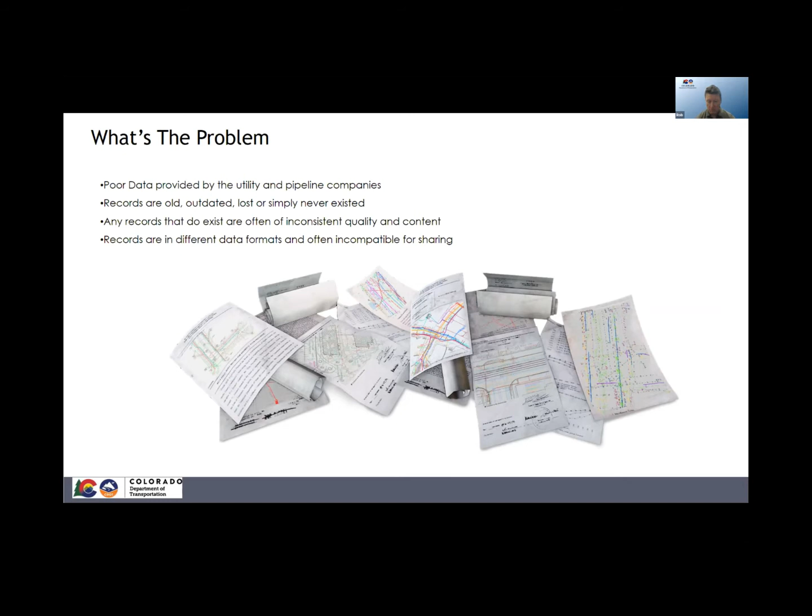So what has historically been the problem with our agency in dealing with utility companies and records? This is not new to anybody on this forum, but poor data provided by utility and pipeline companies, as-built data or records that are old, outdated, lost, or simply never existed to begin with. Any records that do exist are often inconsistent. The quality is unknown, and the content is sometimes unknown as well. Records come in different formats, CAD files, GIS files, paper copies, PDFs, and trying to merge all that together to figure out what is actually in our right of way or project limits is a challenge.

So CDOT as a whole looked at the advantages to moving quicker into a subsurface utility mapping environment. Why are we interested? Having more attribute data about each utility enables more efficient, productive coordination with utility owners. The size of their pipes, the material, the age, that attribute information tells us more about what is in our right-of-way and project limits, and helps us convey it. Some of the utility owners may not even know what they have in our system. So it helps us when we spend the money to capture that level of information.

Knowing the location and depth is extremely important. We've been talking about 3D a lot this morning, and it is very much an important part of utilities. It's subsurface, and a lot of times we survey two-dimensional paint marks on the ground, and that is what is used all the way through engineering design and into construction, and that obviously leads to costly delays and costly relocations that may not even need to happen.

So another big thing for us is during construction, leveraging this data with our contractors and inspectors, the boots on the ground, to use mapping systems that accurately display the location and depth of those utilities, both existing and proposed. I'll show you examples of that in a little bit.

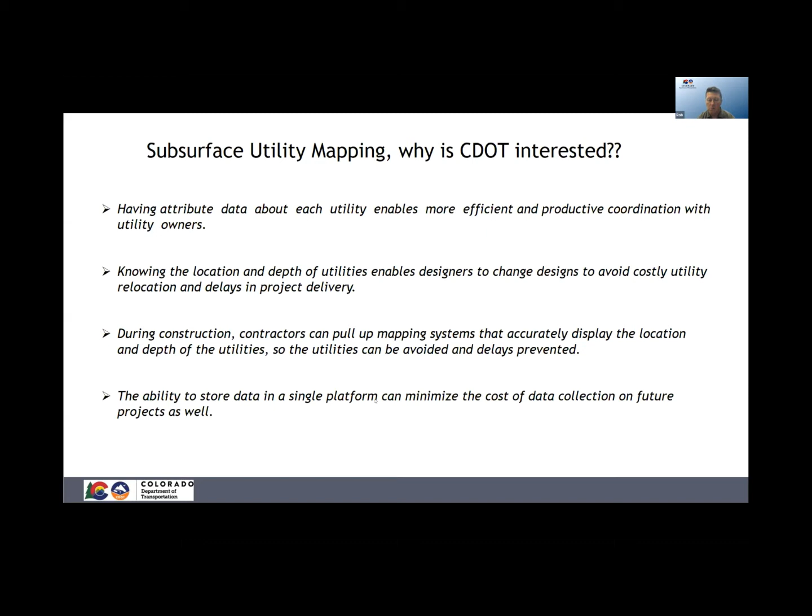But for us, it was really finding a single source or a single platform where we can have all of our data in one place, so that we can leverage that again for all these future projects, or for the existing end users that are working simultaneously around our state on many projects. They can be using the same platform.

So let me jump into a little bit of the legislative changes that pushed us into this subsurface mapping world to really gather data more efficiently. Back in 2015, the Pipeline and Hazardous Materials Safety Administration, or PHMSA, issued rules with new criteria and procedures for determining the adequacy of state damage prevention enforcement programs.

One criterion is the inclusion of an enforcement mechanism in each state's one-call law, which Colorado did not have. We did not have an enforcement mechanism built into our one-call law, which was problematic and could affect federal funding in the future. So that was 2015. We recognized we had this issue, and it was on the radar to address, but as you'll see, it took several years to get there.

In the meantime, we had more damages, and we had an explosion in April 2017 in Firestone, Colorado, that was showcased on many levels as something that could have been prevented. Poor records and lack of locating led to this, so there was all kinds of push from stakeholders, including our Colorado Contractors Association, the American Council of Engineering Companies, ACEC, and CDOT.

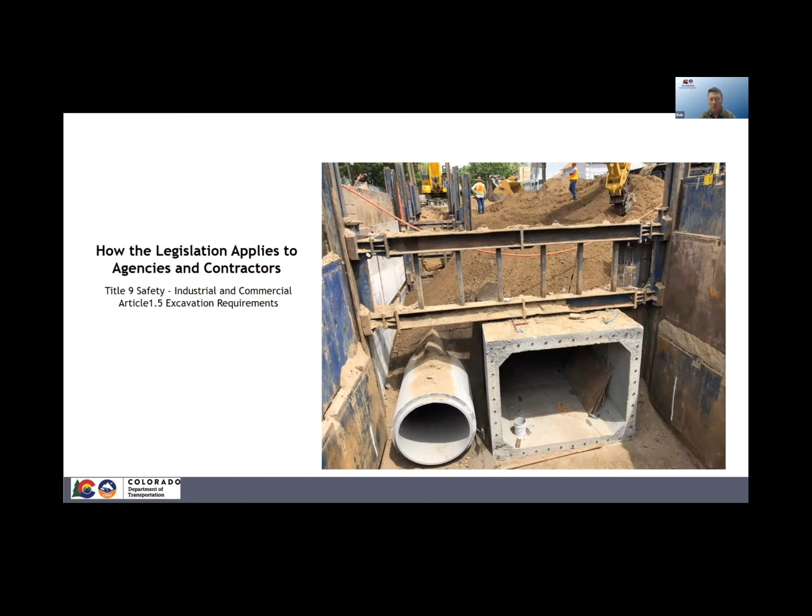There were a lot of stakeholders, but it was really pushed by two bipartisan representatives. Senator Ray Scott, a Republican, and Senator Kerry Donovan, a Democrat, co-sponsored this bill in 2018 to revise our one-call statute, which was signed by our governor on May 25th, 2018. What I'll explain here is how this legislation applies to the agency and to contractors, but it was more impactful to the agency.

From the agency side, the one-call law revision had the new requirement for subsurface utility engineering. It requires CDOT, or the agency, to notify the one-call center if we have a SUE-required project. I'll talk about the criteria we evaluate shortly. But assuming we have met those criteria, the agency must engage the one-call center with a SUE notification.

That subsurface utility engineering notification requires the utility owners to provide their best available records. That could be marking in the field, paper copies, or other information. Best available records can mean a lot, but the law requires a 10 business day return on that information, which is important for accountability by utility owners. And then the project owner, the agency in this case, must provide a stamped plan depicting the utilities at their achieved quality level.

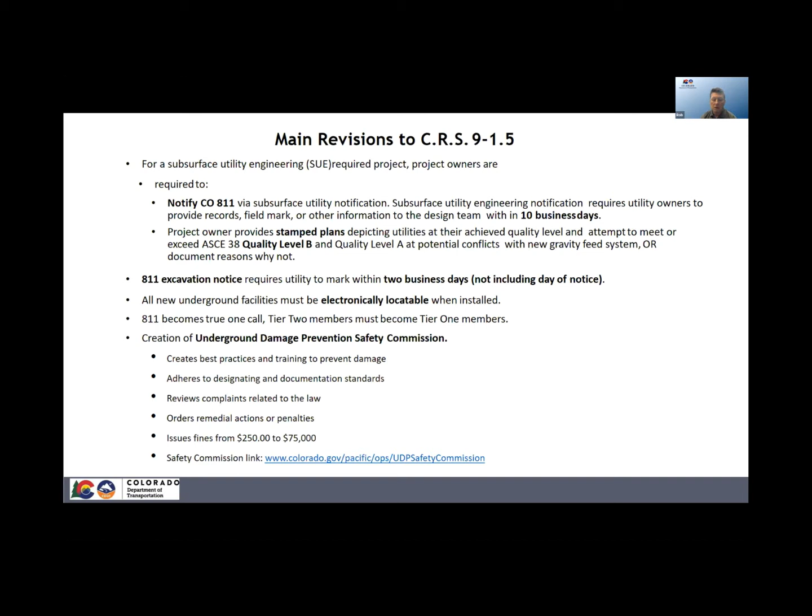and how many complaints are being levied against the company and how many times fines are being issued. So that could start to really multiply as things go forward. So the Safety Commission link is shown here if anybody's interested in seeing what we're up to from the Safety Commission side of it.

So with those changes in the one-call legislation requiring SUE in the pre-construction side, Colorado became an ASCE 38 state. Right now we're at 38-02, but our law is tied to ASCE 38. And so whatever the current version is, when 38-21 comes out, will be applicable to our law. And so CDOT moved into a SUE implementation period after August of 2018.

Sorry, I'm next to a railroad track, if you can't tell. Apologize.

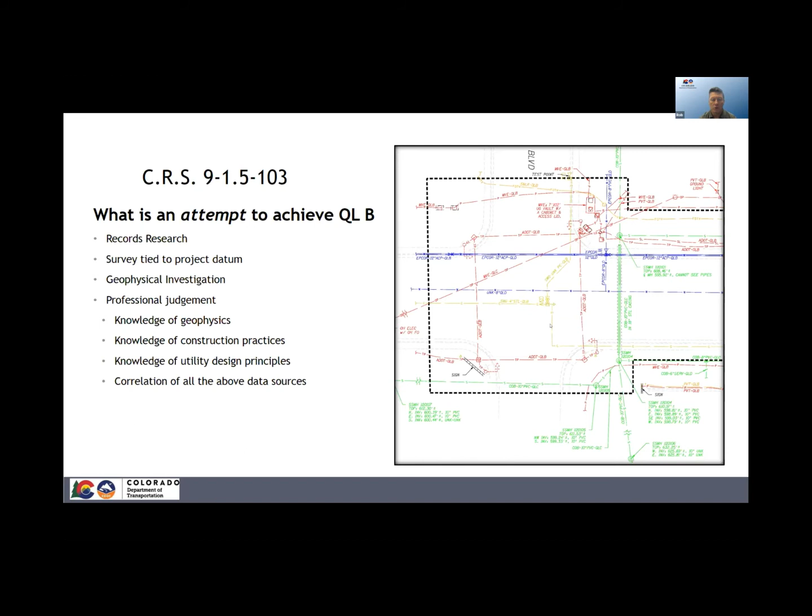And so that's what you're seeing on the right. This is an example of some of our SUE plans that have been delivered by our SUE consultants. Some of the subsurface utility engineering plans, again, SUE required project, SUE notification, the depiction of the utilities stamped ASCE 38 standards, any reasoning why they're not at quality level B is applied, and then any reasonable rationale, again, by the PE in charge of the quality levels is required.

And then, again, quality level A for underground facilities at the point of a potential conflict with a gravity-fed system is a requirement. And so, again, this is what's built into our SUE plans. CDOT had moved into a new process of capturing the SUE data during our workflows. What it entailed was capturing the data, high accuracy GIS data first, by our SUE investigations.

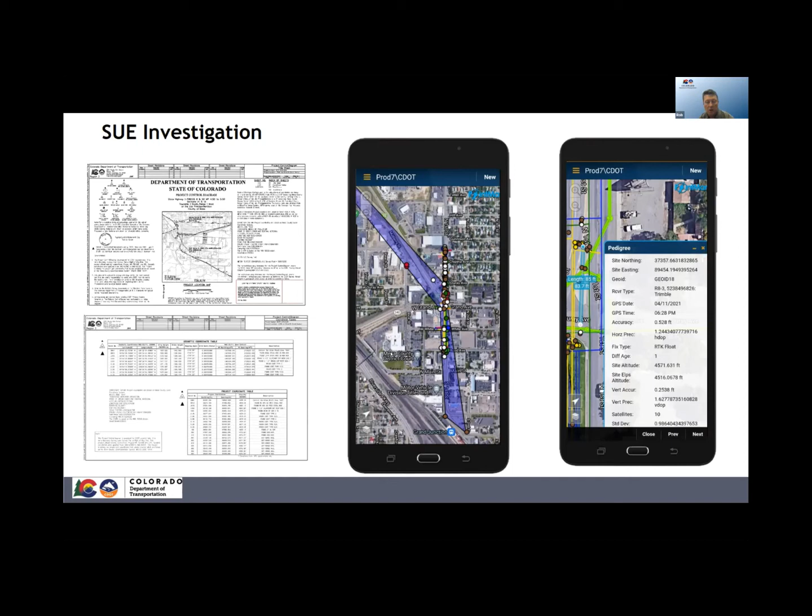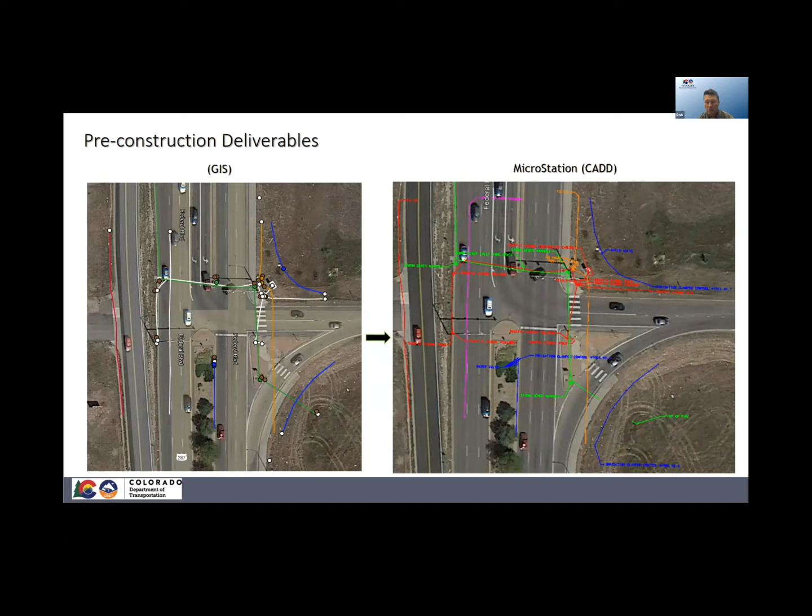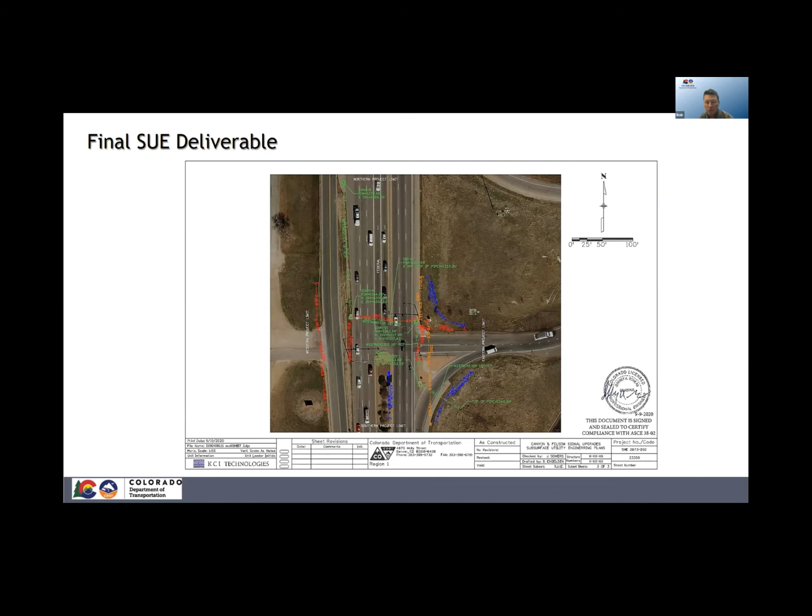And so we have a process that we've developed where we site calibrate our GIS mobile app. The data is collected by the SUE vendors in this app, so we're able to capture this GIS data into our GIS database for utilities, and then move it through a process where we take it all the way through engineering level deliverables. And so this example is GIS data capture first on existing utilities, delivered to our MicroStation environment, and then ultimately delivered with quality levels and a stamped certification by the SUE vendor that this meets the ASCE 38-02 standards at this point.

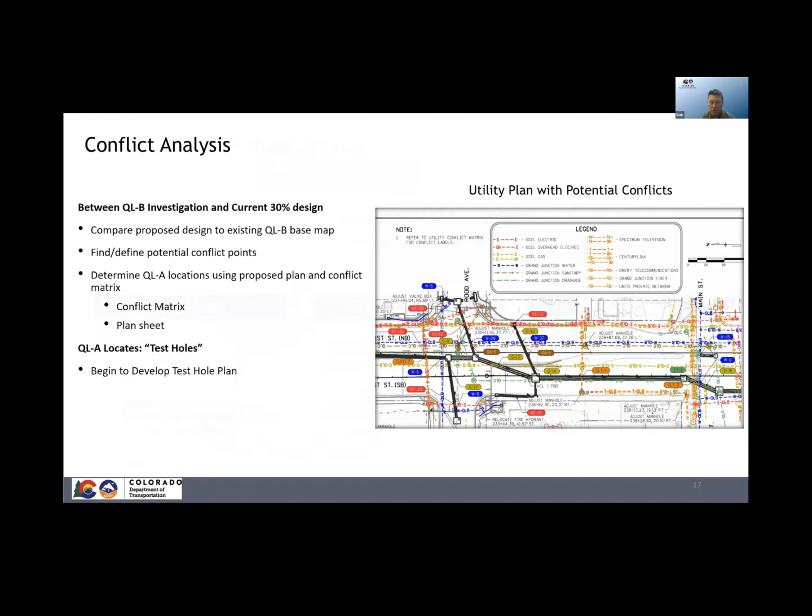But we take this SUE data that's been required by our legislation now, and we leverage it through our design principles. Like I said, from 10 to 30% design, we're using it to find potential conflicts with new improvements. Like this example on the screen is a new storm drain line, and you can see all the flags of potential conflicts. We have quality level B, quality level C, we have quality level B gas lines in here. So we have a good understanding of the certainty of that data horizontally, and then we can move to test holes and hopefully find those much quicker than if we didn't have quality levels assigned to it.

So we leverage, again, this data for a three-part process with our designers: avoidance, accommodation, and relocation. So using good existing utility data, we can either redesign to avoid something that may be a costly or time-consuming relocation on the utility side. We might be able to accommodate the utility and just adjust in place or notch out a wall or foundation, whatever it might be, or we have to go into a full-fledged relocation of the utility, but it then helps us leverage that with the utility companies that we have vetted every possible design criteria, and we've spent the money to investigate their utilities as a whole.

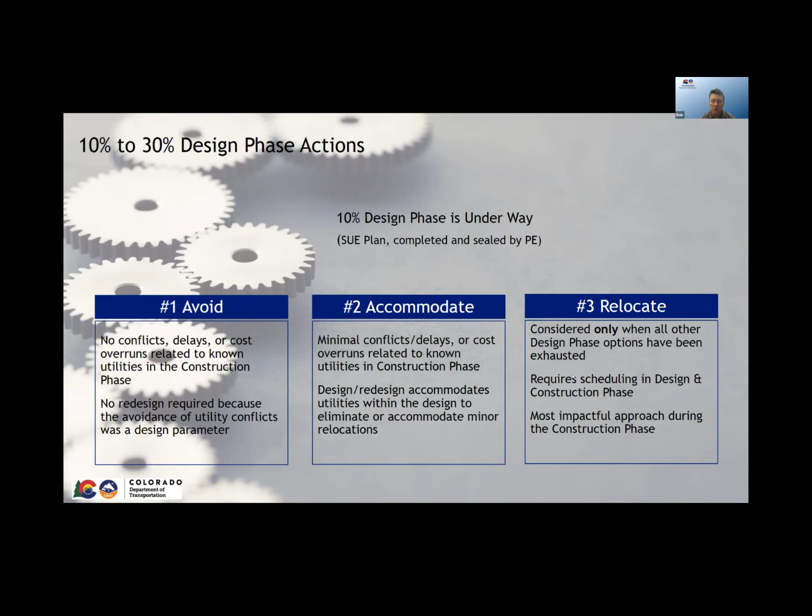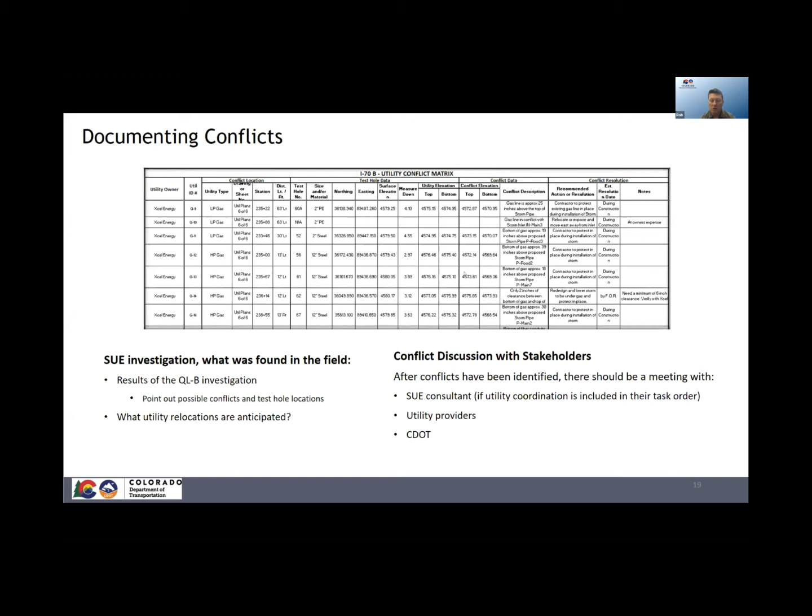So we define this further into a conflict matrix. We take this quality level B information and push it further into identifying the true conflicts. But more importantly, as we get to construction, we then push this data back from CAD.

So we spent the time designing with this information. In this example in CAD, we designed new storm drain based on the SUE deliverable. We've then pushed it back to our mobile app for our contractors to use. And you can see their contractors will then have the ability to see the existing utility information and proposed. So you can see the storm drain lines that are in there as proposed.

And so as they're getting ready to initiate excavation or excavation locates, they have this at their disposal so that they can identify any conflicts with the locating that's happening for excavation versus what we had during the SUE investigation, so it can be resolved rather quickly. But they can also document any new potholing or test holing that they're doing for excavation, and they can also document with photo sketches and forms on the actual construction as well.

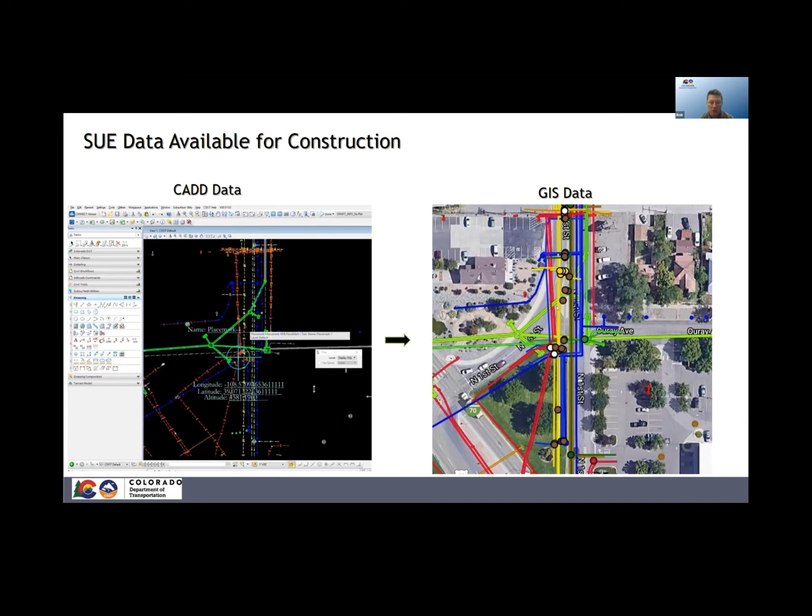So I know this was kind of high level and quick, but I wanted to give you guys a quick overview of what we're doing in Colorado, and I appreciate the time today, and I welcome any questions at this time.

Thanks a million, Rob. I think that was really clear how this happened in Colorado. I have a couple of questions. First, about the legislation and regulation, then secondly about the SUE survey. You mentioned two primary causes at the beginning. First of all, in 2015, PHMSA basically said the Colorado 811 didn't have an enforcement mechanism, so that was an important motivation. Then secondly, you had the Firestone incident in 2017.

What did the PHMSA report? Was that something that had potential penalties for Colorado? If you didn't implement something to solve that problem, would Colorado be in contravention of some legal requirement from PHMSA?

Well, I don't know all the nuances of it, but my understanding is federal grants, federal funding could have been an issue for us in the future as far as trying to secure federal dollars based on the fact that we didn't meet federal requirements. So it was more along those lines, that it was a potential funding move on the federal administration part. But yeah, there were a lot of changes that came from that.